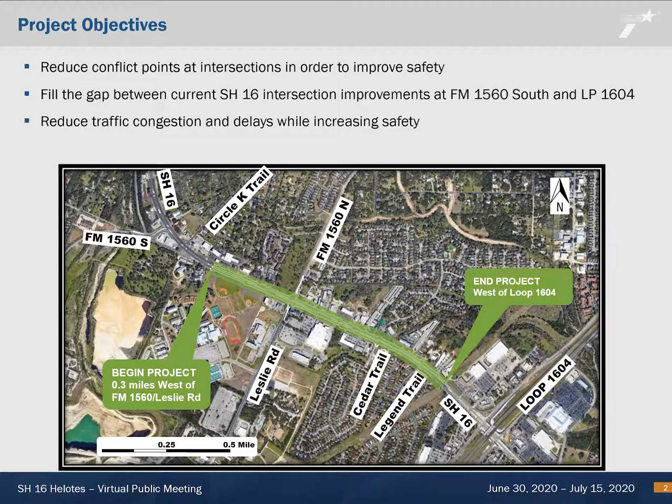The project objectives of the SH16 Helotes project are presented in no particular order. The first is to reduce conflict points at intersections to improve safety. Conflict points occur when two vehicle paths cross. Next, TxDOT is proposing to fill the gap between the current SH16 intersection improvements at FM 1560 South, which is located to the west of the proposed project, and at the newly built displaced left turn intersection at Loop 1604. Our overall goal is to reduce traffic congestion and delays along the corridor while increasing safety for all users.

The SH16 Helotes project is federally funded using congestion mitigation and air quality improvement funding with the estimated construction costs of $8.6 million. The project team started the project in October of 2019. In May, TxDOT held an agency stakeholder meeting with state and local agencies to receive their feedback on the proposed improvements. In June, TxDOT met with affected property owners to present proposed improvements and receive their feedback. We are now requesting the public's input on the proposed improvements, which will be presented to you today as part of this virtual public meeting.

We are requesting your feedback and will consider all comments received. After addressing comments received during this virtual public meeting, the project team will finalize the proposed improvements. Next, TxDOT will begin the final design plans for bidding and construction. TxDOT is currently conducting environmental studies to analyze potential project impacts to various environmental resources. Environmental clearance is expected by the winter of 2020. Next steps include right-of-way acquisition, as well as utility coordination and adjustments. The project is anticipated to begin construction in the spring of 2022 and is estimated to take approximately 24 to 30 months.

The proposed improvements include converting two intersections along the corridor to a type of intersection called a restricted crossing U-turn, or RCUT intersection, to fill the gaps between the existing RCUT intersection at FM 1560 South and the displaced left turn DLT intersection at Loop 1604. SH16 would consist of 3 continuous through lanes in each direction with continuous 6-foot sidewalks, curb and gutter, and 5-foot shoulders on both sides of the roadway. Currently, drainage in the project limits is accommodated with open ditches. The proposed drainage improvements would include open ditches and a storm sewer system beneath the roadway. The proposed project would also include adding a signalized left turn at Legend Trail.

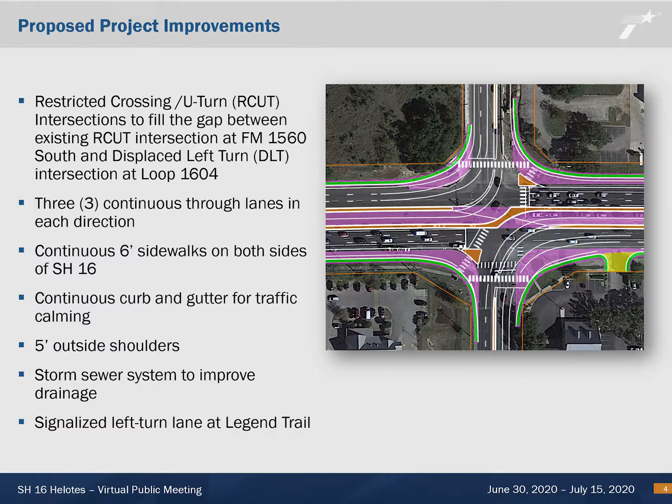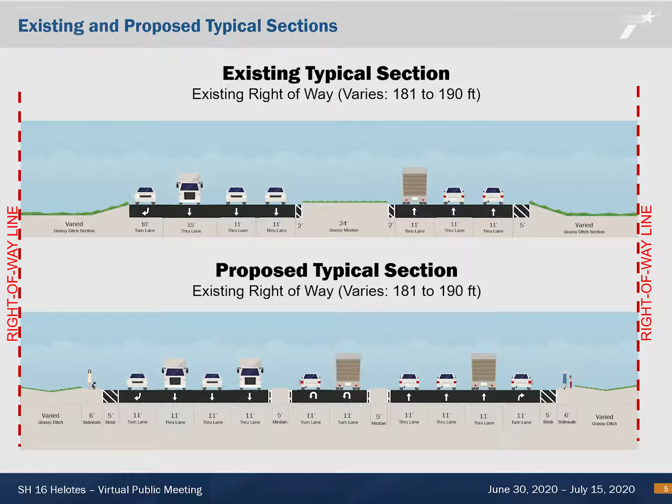The top image is the existing typical section, which is a cross-section of what SH16 looks like today. SH16 currently consists of 2 to 3 through lanes in each direction. The bottom image is the proposed typical section, which shows what SH16 would look like if the project is constructed. SH16 would consist of 3 through lanes in each direction, right turn lanes, and turnaround lanes. The project improvements would be primarily within the existing 181 to 190 feet of right-of-way.

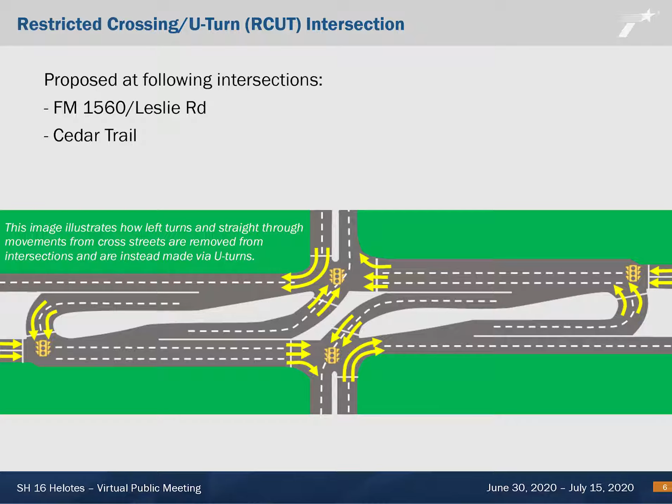At FM 1560 Leslie Road and Cedar Trail, the project team is proposing to convert these intersections to a restricted crossing U-turn, also known as an RCUT intersection. The diagram you see here illustrates how the RCUT intersections would work. Now let's watch a short video that describes the major components of the proposed project.

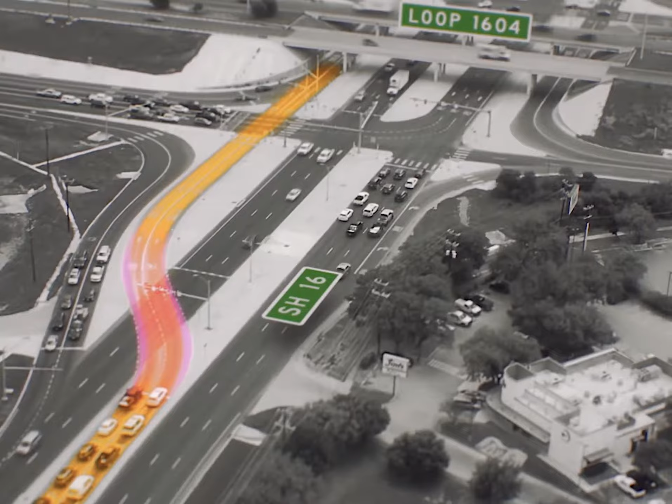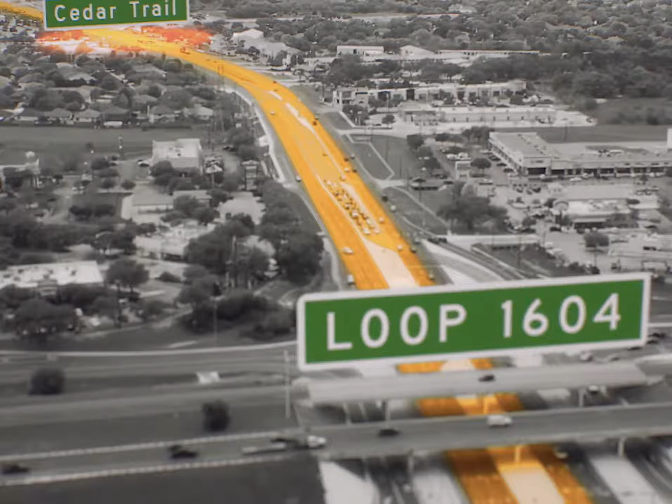There's a lot happening on SH16 near the 1604 freeway. New left-turn crossovers allow cars to get onto 1604 without clogging up the traffic under the freeway. And the intersection at SH16 and FM 1560 has been optimized for efficiency and safety. But for SH16 to work at its very best, we need to improve the intersections between the freeway and 1560. Think of it this way. On any road, you might imagine the paths that cars could follow. Drive straight, turn right, and so forth. And at intersections, these pathways cross, which creates conflict points, or places where crashes are more likely.

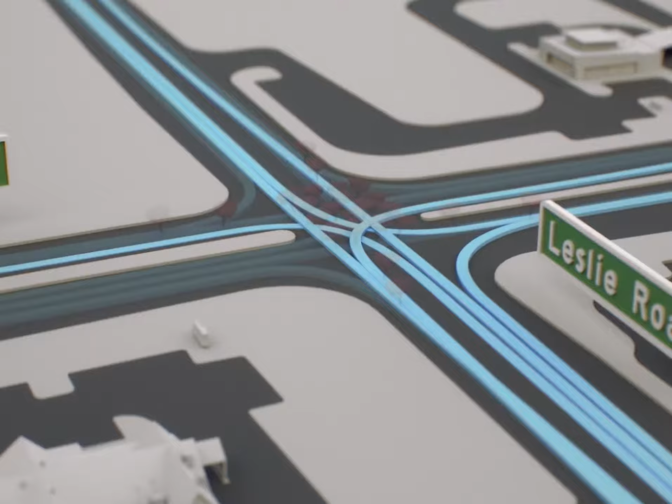If enough paths are crossing, we wait at a stoplight. And when even more paths cross, we wait even longer. At the Leslie Road intersection, for instance, drivers on SH16 can go straight, right, or left. And Leslie Road can go straight, right, or left. And those crossing paths create conflict points. And a driver on SH16 crosses 6 paths just to get through the intersection.

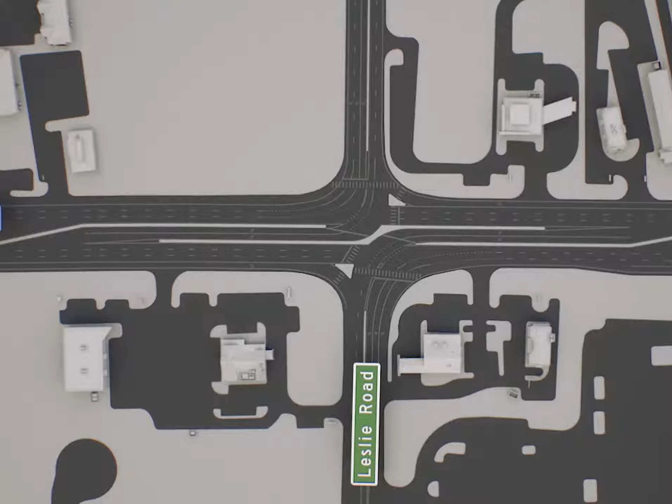And if they hit a red light, they'll wait for oncoming left turns, and then they'll wait for cross traffic, and then again for cross traffic left turns. That's a long time to wait. At the new Leslie Road intersection, drivers would only wait once before getting their green light.

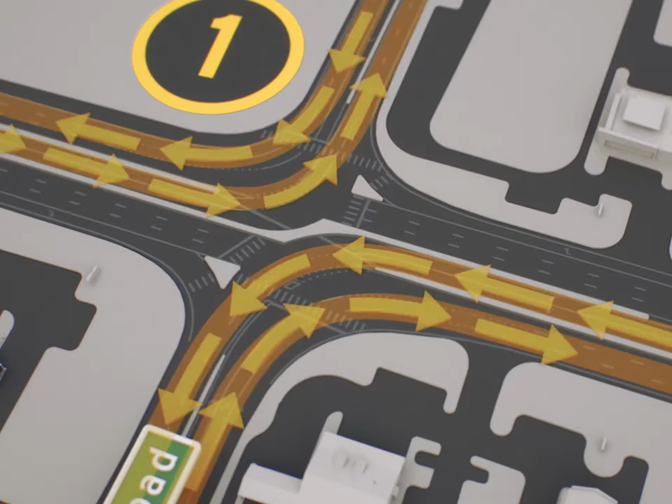Here's how. The improved design sends all drivers on Leslie Road to the right, away from the intersection, where they can make a U-turn and continue on their original paths. Meanwhile, left turns off of SH16 would move through the intersection at the same time. One light for everyone on Leslie and left turners on SH16, and a second light for everyone else.

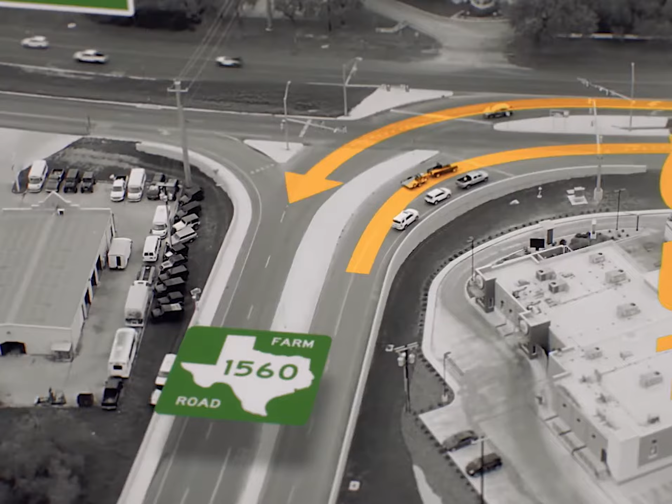And those crossing paths for drivers on SH16, they go from 6 to 2 at the intersection. The new U-turns would also have a stoplight. Like at the main intersection, drivers wait only once before getting a green light. This efficient design, known as a restricted crossing U-turn or RCUT intersection, is already in use at FM 1560, and currently is planned for the Cedar Trail intersection as well as at Leslie Road.

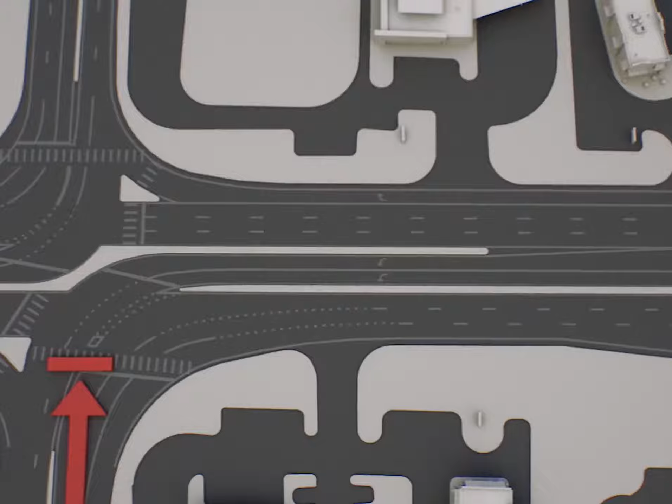RCUTs have proven effective across the country, reducing crashes by 30% and fatal crashes by as much as 50%, all the while improving travel time by 30 to 40%. And that includes drivers traveling through U-turns because they spend less time waiting at red lights. New, innovative RCUT intersections and left-turn crossovers on SH16 near 1604 would streamline commutes while increasing safety. Another example of how TxDOT is clearing the way for Texas drivers.

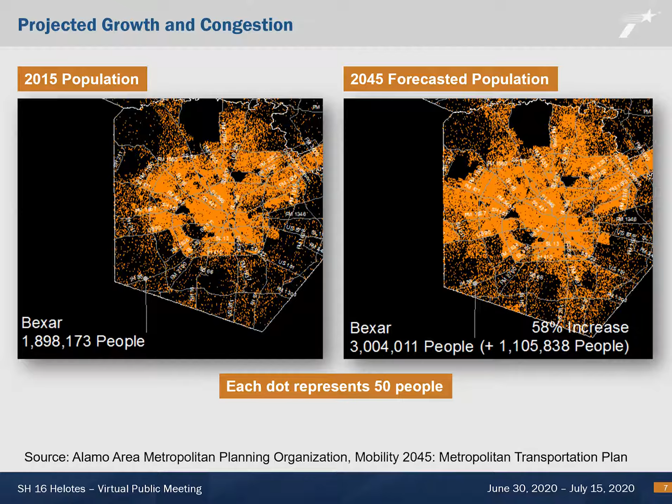According to the Alamo Area Metropolitan Planning Organization, Bexar County's population is expected to grow by 58% by the year 2045, with much of that growth occurring in West Bexar County around the project location. The current roadway design is not sufficient to meet the expected demand, which is one of the reasons TxDOT is proposing to improve SH16.

The project team conducted a traffic analysis of the project area based on the existing conditions and the proposed improvements. The team collected actual traffic counts in 2019, which showed that the average daily traffic on SH16 at the FM 1560 Leslie Road intersection was 45,400 vehicles per day. Utilizing expected growth rates, the project team forecasted that the average daily traffic at this intersection is expected to increase to 76,300 vehicles per day in 2044.

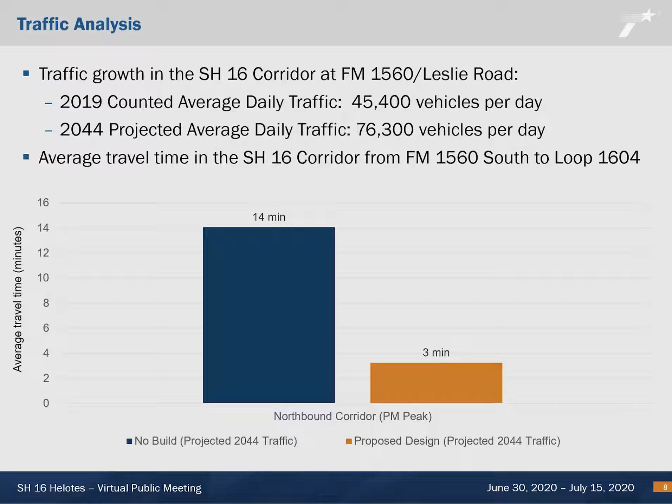Utilizing traffic modeling software, the project team analyzed average travel times on SH16 from FM 1560 South to Loop 1604 for no-build and proposed design based on future traffic in year 2044. In 2044, if the proposed project were not constructed, which is the no-build scenario, travel times would increase to 14 minutes for northbound traffic. By implementing the proposed project in 2044, travel times would decrease to 3 minutes. A similar time difference is expected for the southbound traffic.

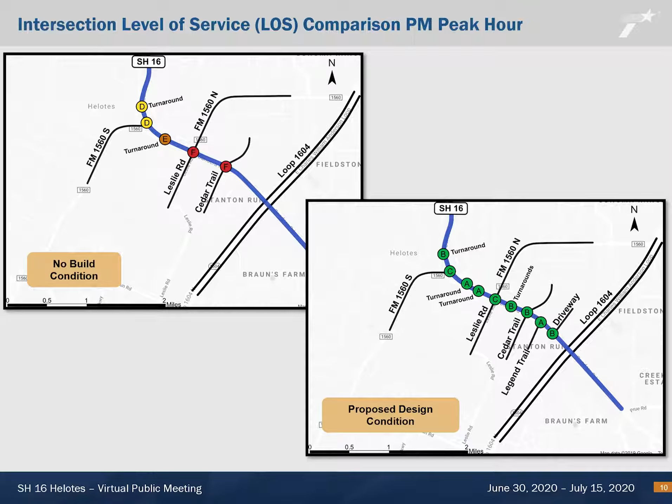Similar to the morning peak hour, under the proposed project, all intersections would operate at a level of service C or better in 2044 in the afternoon peak hour.

This slide covers some of the benefits of RCUT intersections identified by the Federal Highway Administration, also known as FHWA, including improved safety, efficiency, and air quality. As mentioned, the proposed RCUTs would reduce conflict points at the FM 1560 Leslie Road and Cedar Trail intersections. Conflict points would be reduced from 32 to 18, which on average translates into 30% fewer crashes based on FHWA studies.

The project team also analyzed crash rates at the newly built displaced left turn intersection at SH16 and Loop 1604. Based on this analysis, crashes have gone down by approximately 44% since the intersection was improved. Additionally, the severity of crashes can also be reduced by up to 50% with RCUT intersections. This is largely due to a reduction in conflict points due to left turn movements.

RCUT intersections are efficient because they allow more traffic to go through green lights at traffic signals, which would allow for an improvement of up to 30%. Travel times and delays could also be improved by up to 60% due to reduced stop-and-go conditions at intersections.

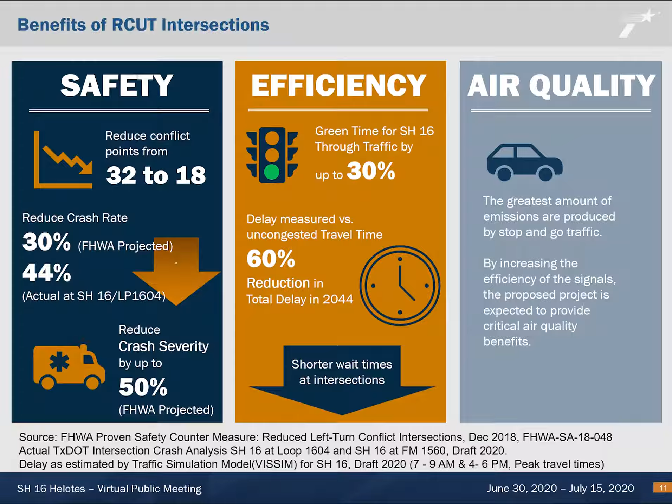The reduction in stop-and-go traffic is also expected to improve air quality, as vehicle emissions are greatest when a car is slowing down and speeding up. This is one of the reasons this project successfully received congestion mitigation and air quality funding.

The project team also analyzed travel time comparisons for FM 1560 Leslie Road left turn traffic for the afternoon peak period in 2044. For eastbound Leslie Road traffic wanting to access northbound SH16 under the no-build condition in 2044, it would take approximately 22 minutes to make the left turn at this intersection and travel north of FM 1560 South. Alternatively, under the proposed project, it would take approximately 6 minutes for eastbound Leslie Road traffic to turn right at the SH16 intersection, utilize the proposed turnaround, and continue on SH16 northbound and travel to north of FM 1560 South.

For westbound FM 1560 traffic wanting to access southbound SH16 under the no-build condition in 2044, it would take approximately 18 minutes to make a left turn at the intersection and travel to Loop 1604. Alternatively, under the proposed project, it would take approximately 5 minutes for westbound FM 1560 traffic to turn right at the SH16 intersection, utilize the proposed turnaround, and continue traveling on SH16 southbound and traveling to Loop 1604.

To get a fair comparison, both the no-build conditions and the proposed project traffic models use the same projected 2044 traffic volumes. The traffic models also measure the travel time from the same point before cars are stopped for the first traffic signal for both the no-build and proposed design to the point the vehicle exits the project corridor to ensure beginning and ending points match for each condition.

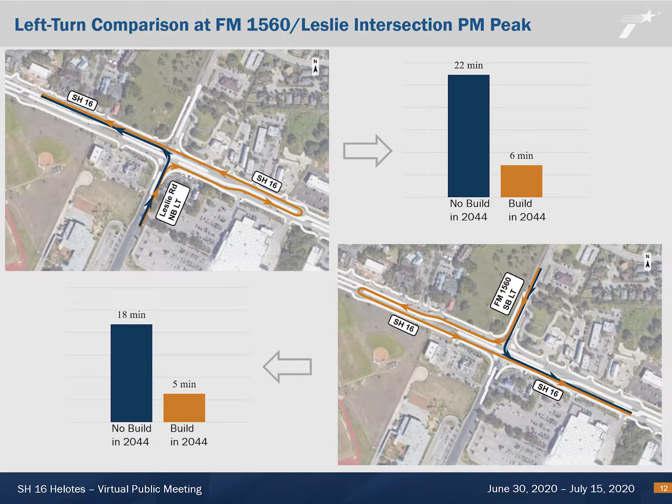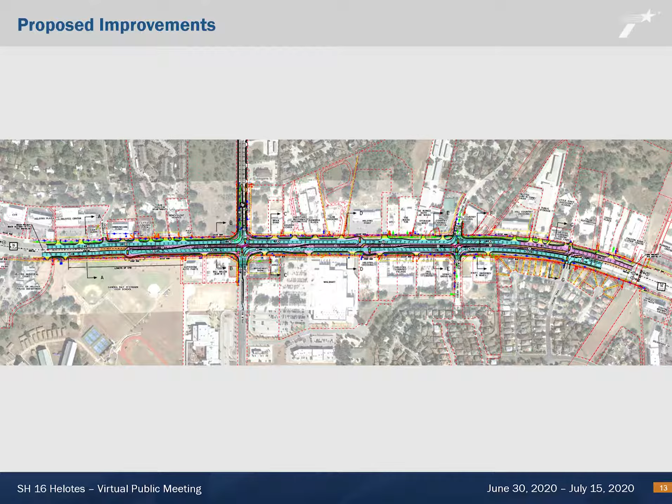Now we will review the proposed project. The proposed project schematic is also available under the Participate tab on the virtual public meeting, where you will be able to make comments directly on the map, and the Review tab where you can download it for your reference. Before we get started, I want to explain the different colors and symbols shown on this map.

The existing right-of-way line is shown by the red dashed line, while the proposed right-of-way is shown as a thick black dashed line. The light blue shading represents the resurfacing of existing roadway. Areas shaded in light purple are areas where roadway widening is needed. Proposed sidewalks are shown in light green, and raised medians are in orange. Driveways are shown in yellow.

As we've mentioned, SH16 would consist of 3 through lanes in each direction. With the proposed RCUT intersection at FM 1560 Leslie Road, traffic traveling on FM 1560 Leslie Road would not be allowed to turn left or travel through the intersection, but would instead turn right at the intersection and use a turnaround. As you can see, similar improvements are proposed at Cedar Trail, where Cedar Trail traffic would turn right at the intersection and utilize the turnarounds.

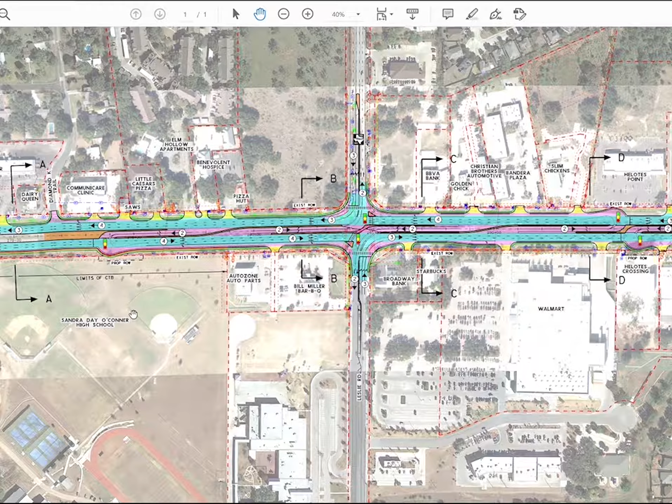At Legend Trail, we're proposing to add a signalized left turn lane. This will help traffic turning left into Legend Trail avoid 2 additional signal lights. The project team anticipates needing minimal additional right-of-way for the proposed improvements in 2 locations. The first area we're proposing right-of-way is at the Sandra Day O'Connor High School. As you can see, we are needing a small clip of right-of-way between the school's baseball and softball fields in order to construct the proposed turnaround.

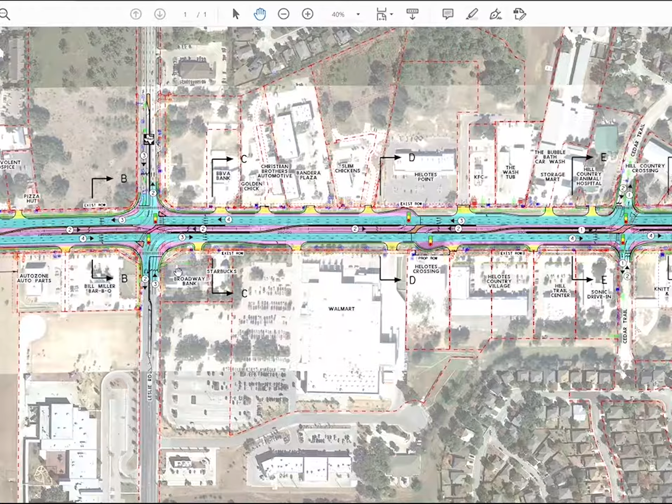The second location for proposed additional right-of-way is at the Helotes Crossing Center to accommodate the turnaround proposed at this location. Information on the right-of-way acquisition process is available for download and review under the Review tab of this virtual public meeting, including a landowner's Bill of Rights, relocation assistance document, and state purchase of right-of-way booklet.

Information concerning services and benefits available to affected property owners and information about the tentative schedule for right-of-way acquisition and construction can be obtained from the TxDOT District Office by calling 210-614-6400. Acquisition and relocation assistance would be in accordance with the Uniform Relocation Assistance and Real Property Acquisition Policies Act of 1970 as amended.

The project team identified the various environmental constraints within the project area early in the project development process and designed the proposed project to avoid or minimize impacts to these important resources. A summary of some of the environmental resources located along the SH-16 corridor and project area include a tributary to French Creek, location of the project within the Edwards Aquifer recharge and transition zones, a geological fault crossing the project

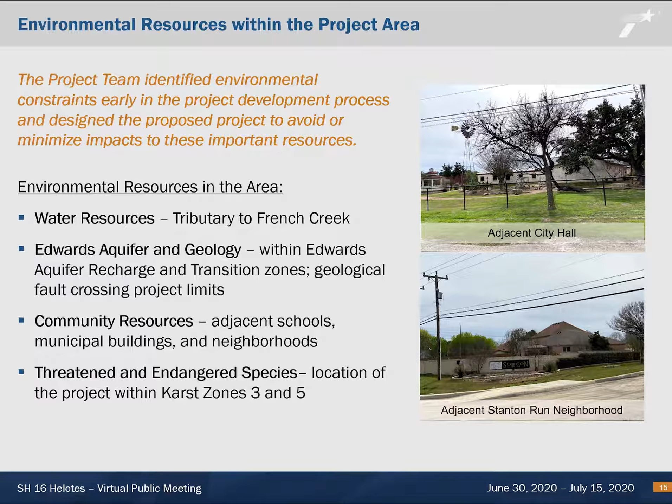limits, adjacent schools, municipal buildings, and neighborhoods, and portions of the project within Karst Zone 3, which is defined as areas that probably do not contain endangered karst invertebrate species, but require karst surveys for confirmation.

Other environmental resources include recreational areas at Sandra Day O'Connor High School that are protected under Section 4(f) of the U.S. Department of Transportation Act, several adjacent noise receivers, adjacent gas stations, auto repair shops, and water wells, and location of the project within a non-attainment area for ozone.

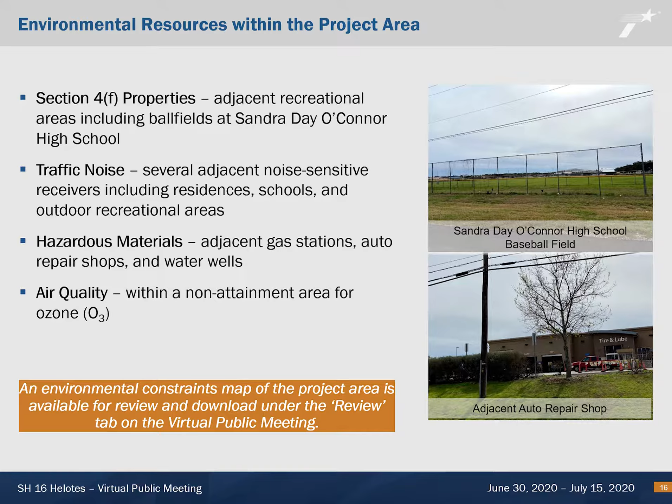A map showing the environmental constraints in the project area that were considered during project design is available for download and review under the Review tab on the virtual public meeting. The SH-16 Helotes project involves environmental analysis of the project under the National Environmental Policy Act of 1969, also known as NEPA. Several environmental studies will be prepared to identify, minimize, or avoid and mitigate potential project impacts to environmental

resources. This includes studies on biological resources, water resources, the Edwards Aquifer, geology, cultural resources, Section 4(f) properties, hazardous materials, community impacts, and traffic noise analysis. After environmental studies are complete, the project team will coordinate with various resource agencies as necessary. Environmental clearance is anticipated in December 2020.

The proposed project would require less than 0.1 acre of right-of-way from Sandra Day O'Connor High School, located between the school's baseball and softball fields. This portion of the high school is protected under Section 4(f) of the U.S. Department of Transportation Act of 1966, which is an act that requires TxDOT to consider potential impacts of the proposed project on significant and publicly owned parks and recreation lands.

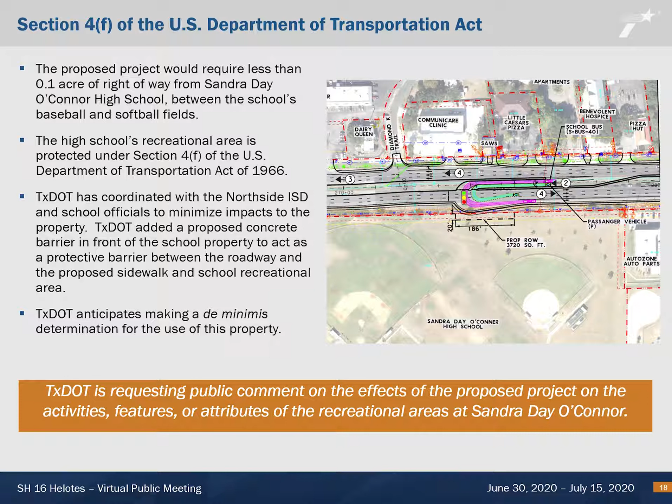Please submit your comments as part of this virtual public meeting using one of the various methods that will now be described. That concludes our presentation.

Thank you for taking the time to view this presentation and participate in the virtual public meeting. If you have any questions or comments, we have multiple ways for you to share them. You can download the comment form under the Review tab and mail in your comments. You can comment directly on the online interactive map or online comment form under the Participate tab. You can email your comments or questions to sh16helotes@pozcam.com. Or you can call the TxDOT project manager at 210-615-6434. Comments must be received on or before Wednesday, July 15 to be included in the official public meeting record.